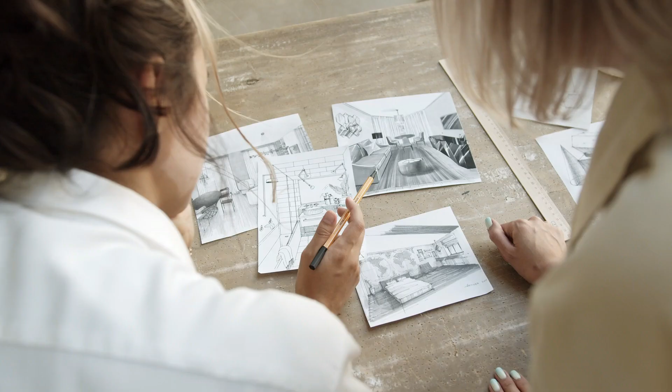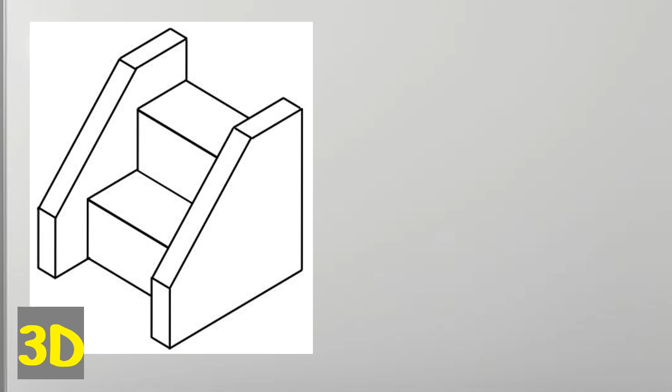Today, let's dive into the world of orthographic projection, a fundamental technique in technical drawing that transforms three-dimensional objects into precise two-dimensional representations. By projecting lines from these objects onto perpendicular planes like top, front, and side views, we can capture their features with accuracy.

Orthographic projection plays a pivotal role in effectively communicating design and manufacturing details, aiding engineers, architects, and designers in conveying dimensions, shapes, and features meticulously through multiple viewpoints.

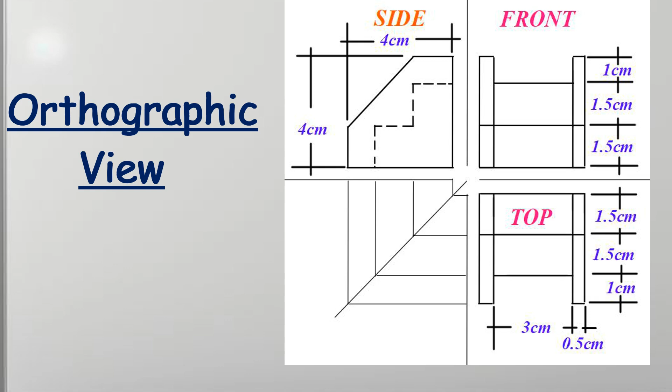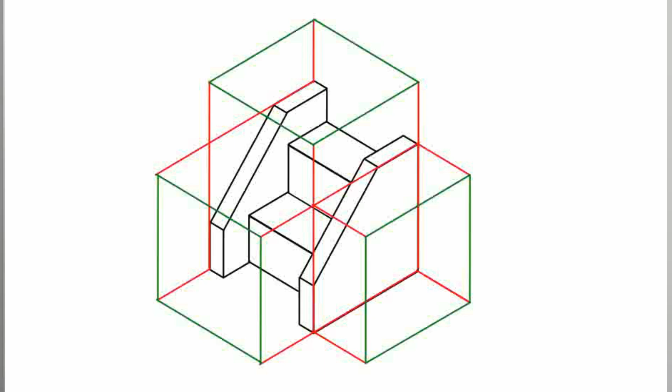In this method, each view, be it the top, front, or side, portrays the object as if it were projected onto a plane directly in front of it, ensuring precise measurements and a clear depiction of all aspects of the object. Mastering orthographic projection is a cornerstone skill in technical drawing, enabling the creation of detailed and precise engineering designs and plans.

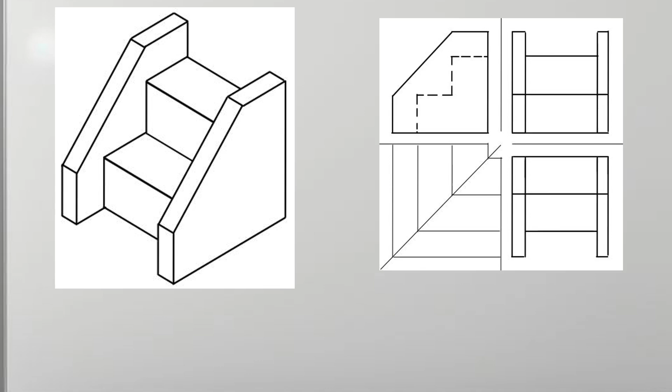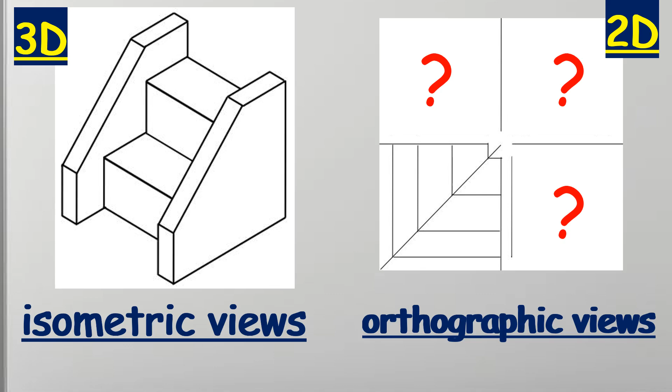Let's now explore the transition from isometric views to orthographic views, a common task in technical drawing and engineering design. This process involves translating a three-dimensional object depicted in an isometric view into two-dimensional orthographic views like the front, top, and side perspectives. Here's a step-by-step guide to navigate this conversion seamlessly.

When working with isometric views, envision three sets of perpendicular lines representing the object's x, y, and z-axes, aligned parallel to the object's edges and set at 120-degree angles to each other.

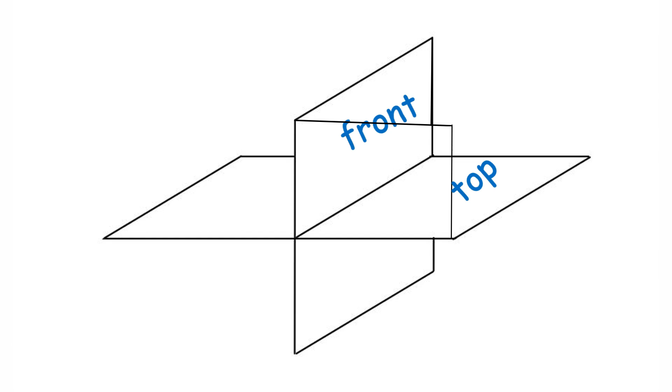Now that we're in the first quadrant in box form, we'll unfold it and turn it into two dimensions to make it more readable. For the sake of clarity, let's go step by step.

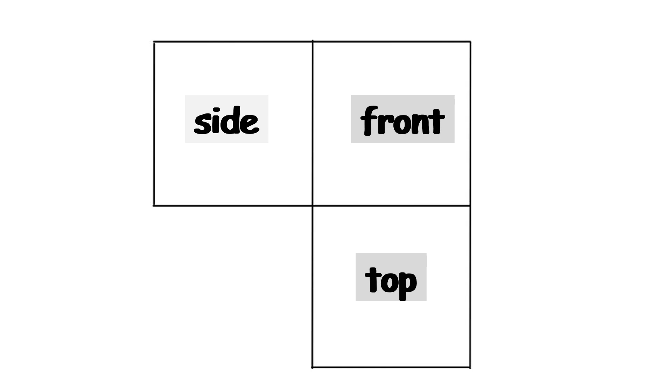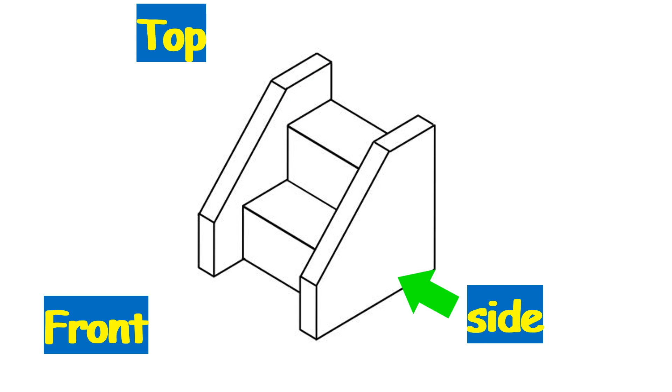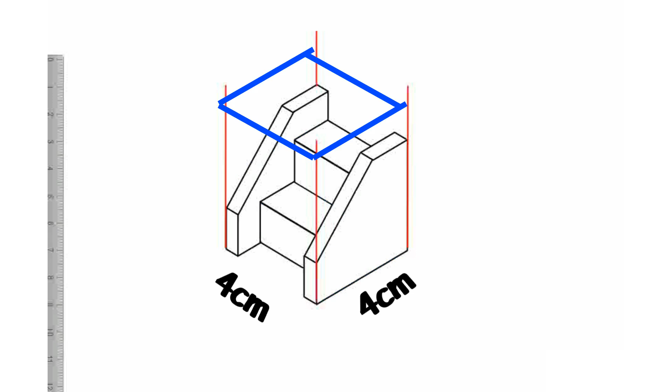Now, let's move on to drawing orthographic views from isometric views. Begin by visualizing the object in its isometric form, capturing all three dimensions. Project or extend the z-axis lines out of the drawing. Create a 4 cm by 4 cm square out of the drawing after projection, which is the largest size for both width and depth.

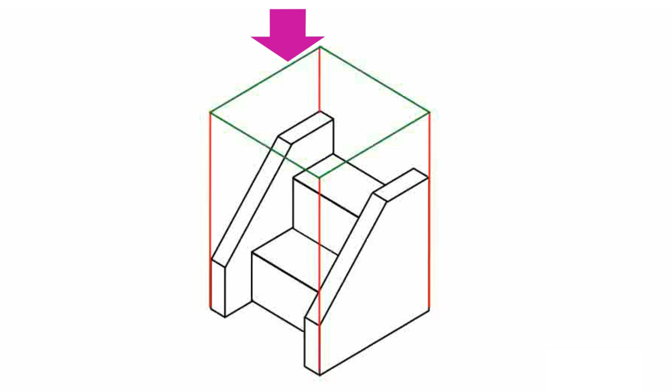Next, identify which plane may be seen from top. If the length of the x and y-axis lines is more than 0, the plane may be seen from above. If not, it cannot. Therefore, check the length of the plane to determine if it is visible from above.

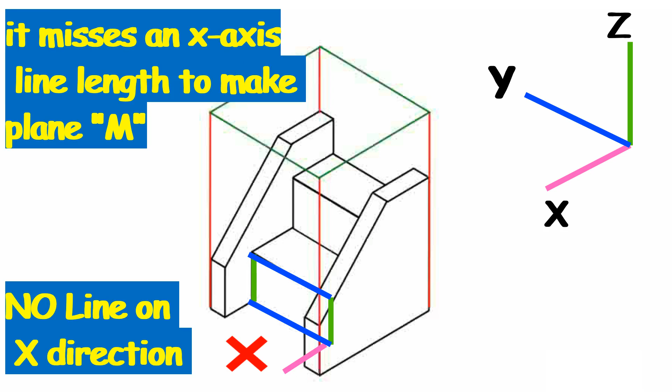Are the y-axis and x-axis line lengths present in this plane, plane M? You're right if you said no, as it misses an x-axis line length. To put it another way, this plane is invisible from above. The next plane, N, is therefore visible from above since it has the x-axis and the y-axis line.

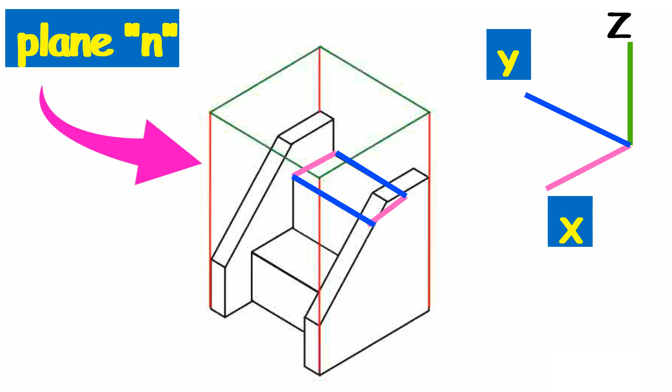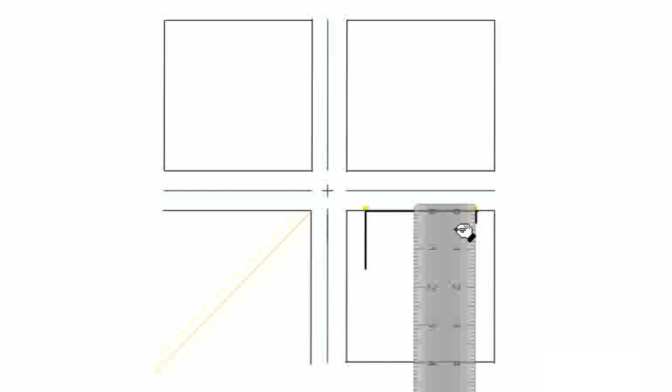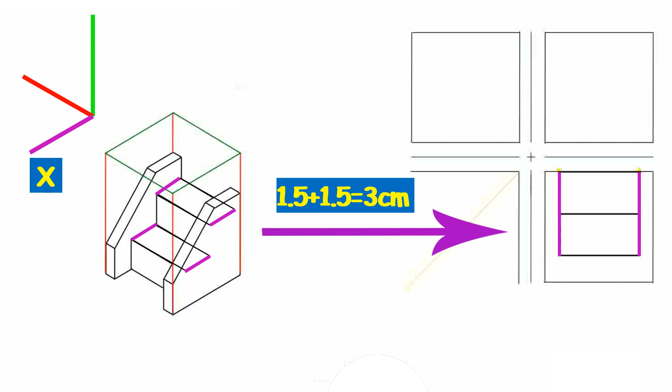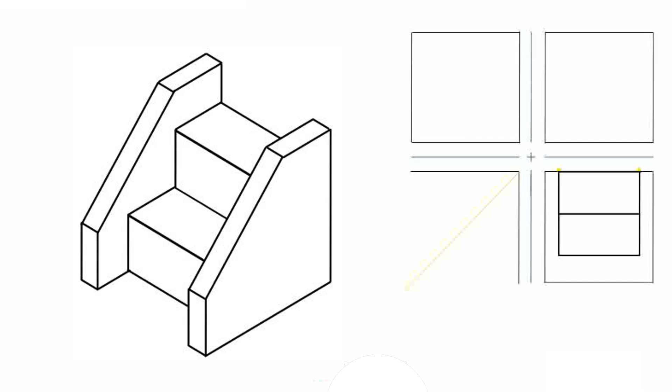Then, using the same technique, proceed to draw another plane. Using the same previewing rule, check whether the same plane O and the same inclined plane K can be seen from top. To remind you of the rule, if there is line length on the x and y axes, the plane may be seen from top. Otherwise, it would be invisible from top if one of them had no lines.

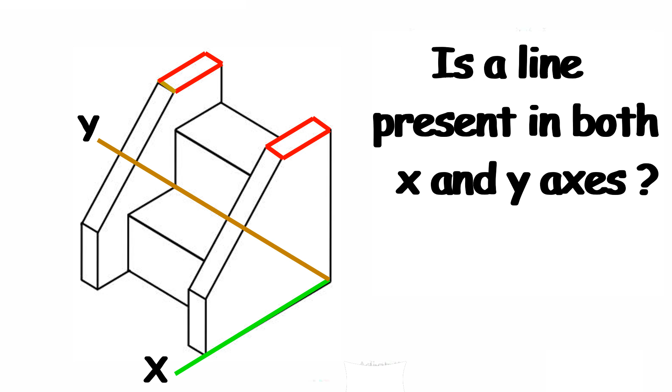So is there a line in both x and y in plane L? You're right if you answer yes, which means that this plane can be seen from top. What about J-plane? If you answer that it's not visible, you're right because the y-axis line is missing.

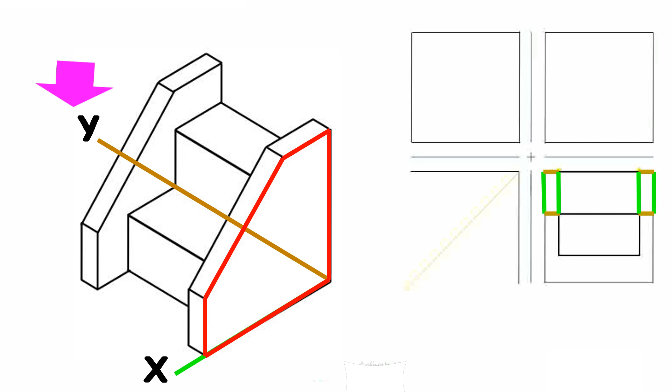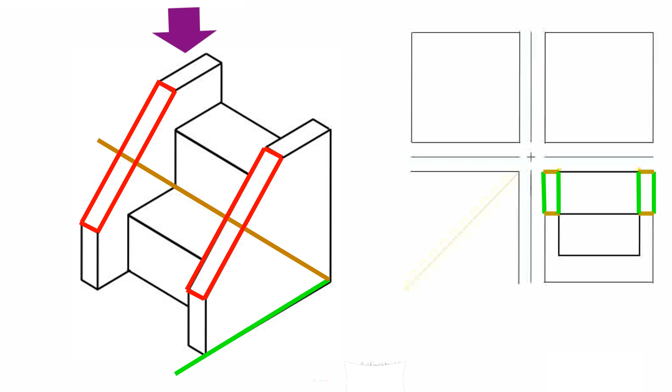And what about the identically inclined plane K? You are right if you say that it is visible from the top since there is a line on both x and y axes. Therefore, in top view, draw the planes L and K that are visible.

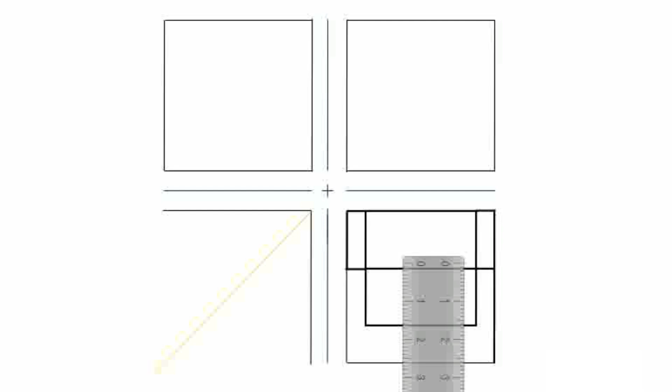Now that the front view is the primary consideration, the plane is seen from the front if it is drawn on the y and z axes, or if it contains lines on both axes. Otherwise, it cannot be seen from the front. Then check that both the y and z axes of the plane have lines.

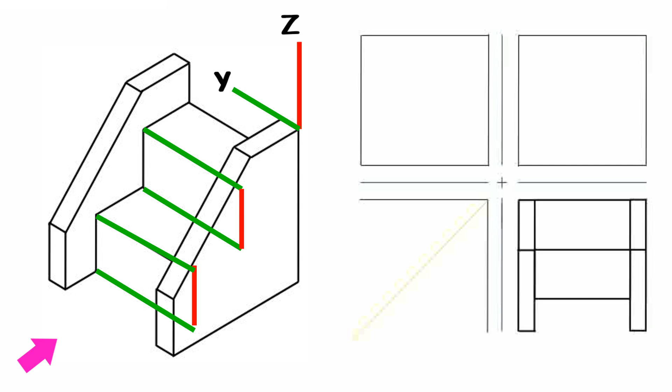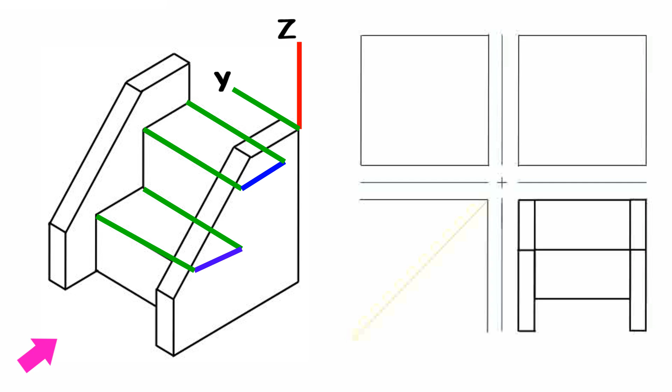We can claim that the planes are visible from the front side, since we can see that both of them have lines on the y and z axes. How about planes M and N? Do they have lines on the y and z axes? If the answer is no, you are correct, since the planes are not lined up on the z-axis. In addition, the y and z axes are not used to create the planes. Therefore, draw the front side's visible planes I and O.

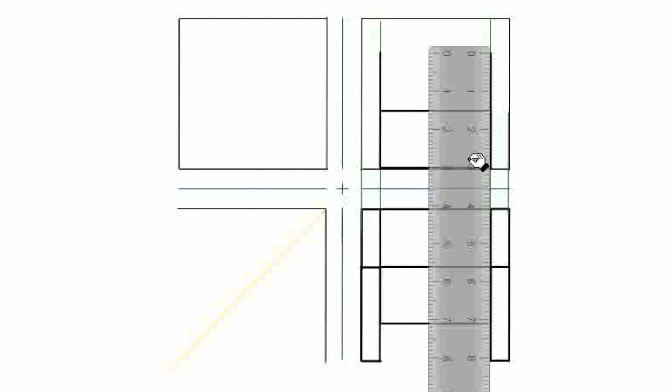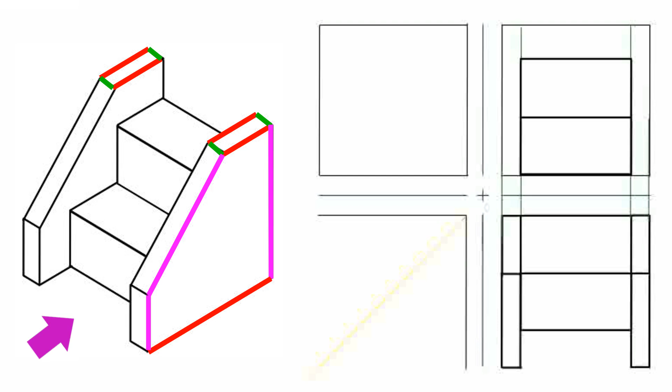In order to complete the front side, which planes are still required? Can you see the U and L planes from the front? If you answer no, you are correct, because neither the y nor the z axes are used to build the planes. Therefore, draw planes G and F to complete the front view. On the opposite side, draw the same 0.5 by 1.5 rectangle.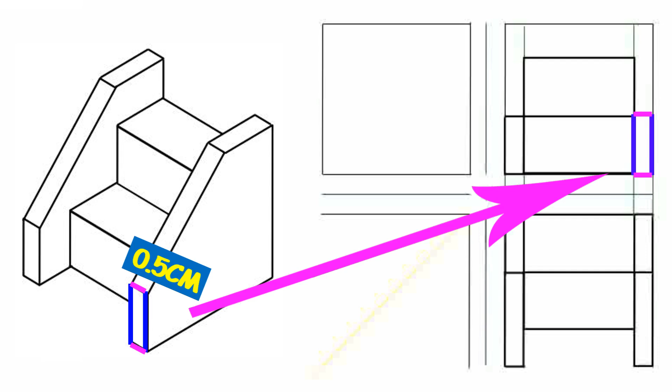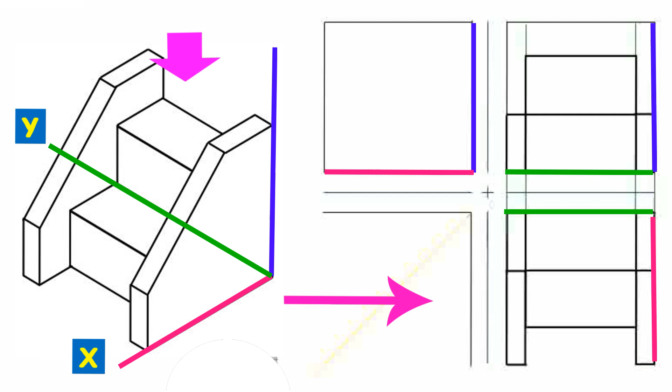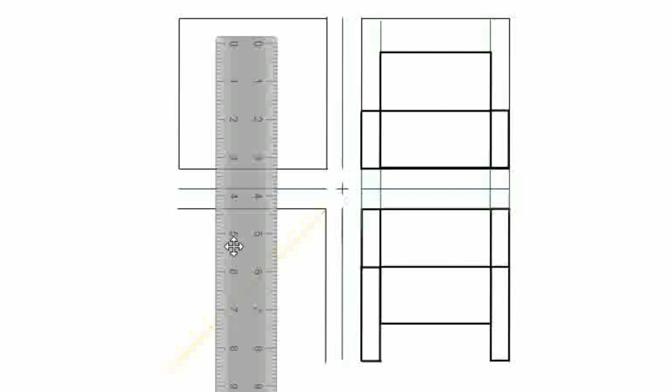The planes are formed with two axes. So keep in mind that if they are drawn with the z and y axes, they are visible from the front. If they are made with the z and x axes, they are seen from the side. Lastly, the plane can be viewed from above if it was made utilizing the y and x axes. This is the final plane for the front side, and as we can see, it is inclined. Draw the other in the same manner, and this is how it turns out.

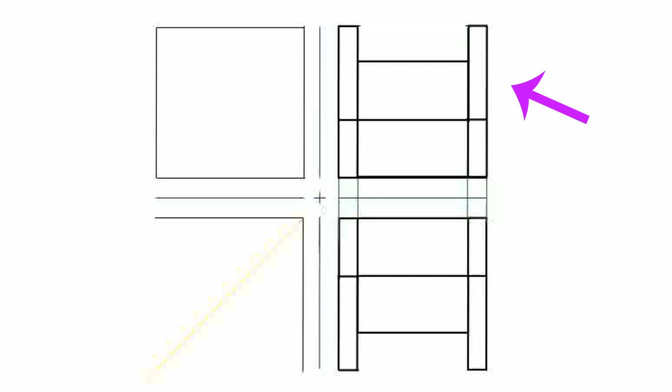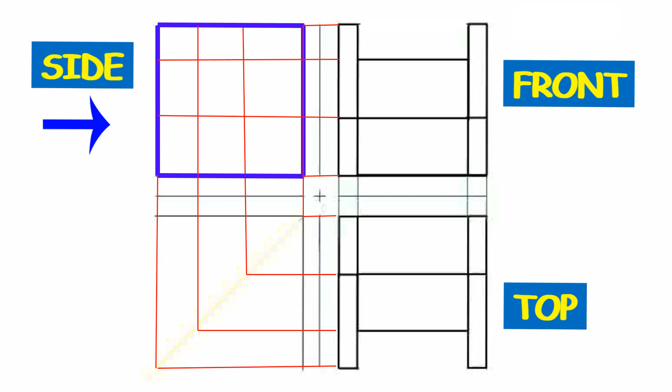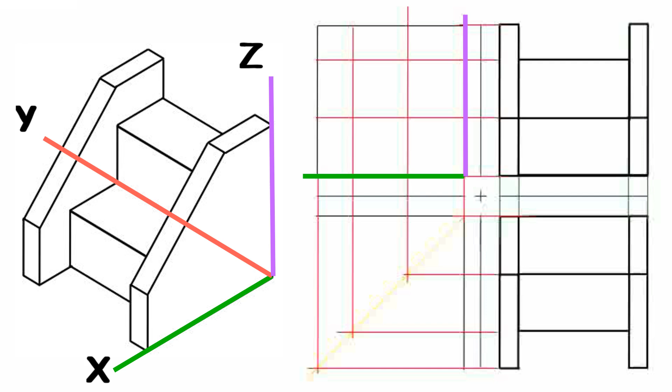The side view is the final view that has to be drawn. The lines are projected from top and front perspectives to create the side view drawing. We can simply get the locations where the view can be drawn after projection. As previously stated, while drawing a side view, take into account lines Z and X, or ignore line Y, which turns into a point when seen from the side. As we can see, the first plane is drawn using both the X and Z axes, or it has a line in both, which indicates that it is visible from the side.

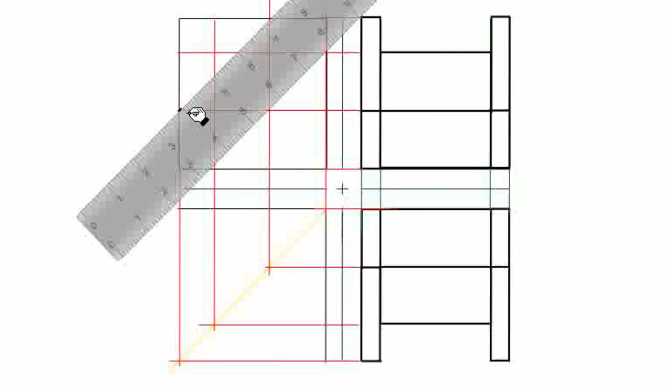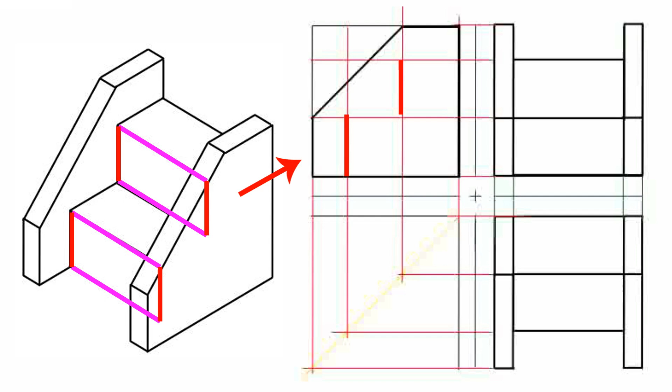This plane is created using the y and z axes. Therefore, there isn't a line on the x-axis to draw it, making it invisible from the side. Instead, we can only see a line on the z-axis, which indicates that it is not a plane. The last plane that has to be drawn is then here. Since the initial plane covers the remaining and final plane from view from the side, we can show this information using hidden lines.

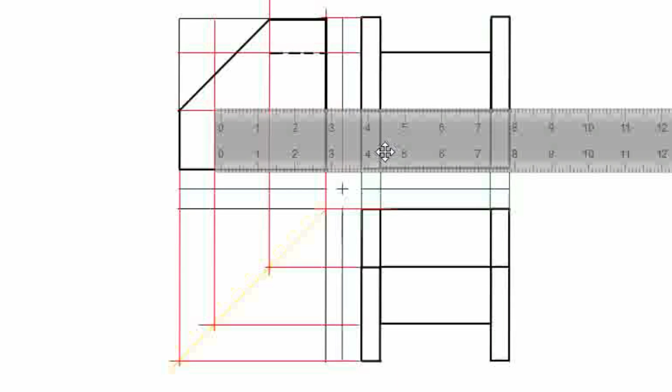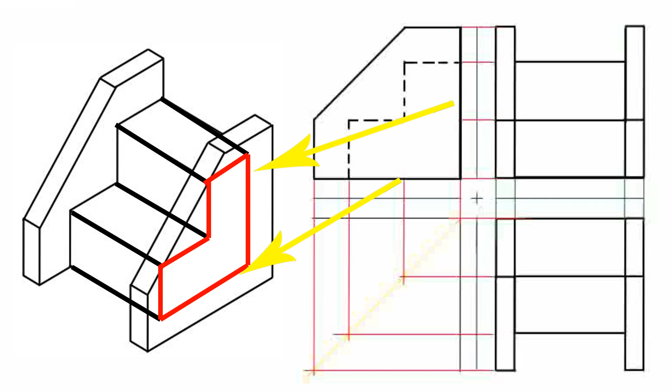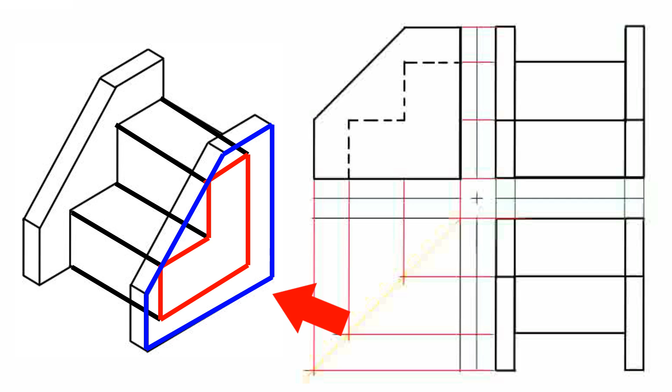When we use the hidden line sign, dashes, these two solid lines are not visible from the side, since they are covered by blue lines. Because it is protected by the first plane with the blue line, the plane with the red line cannot be seen from the side. The remaining lines, however, are not covered by other blue lines, so we can see them from the side. For this reason, the lines are made dashed to indicate that they are not visible from the side, and that the other plane with the blue line is shielding them.